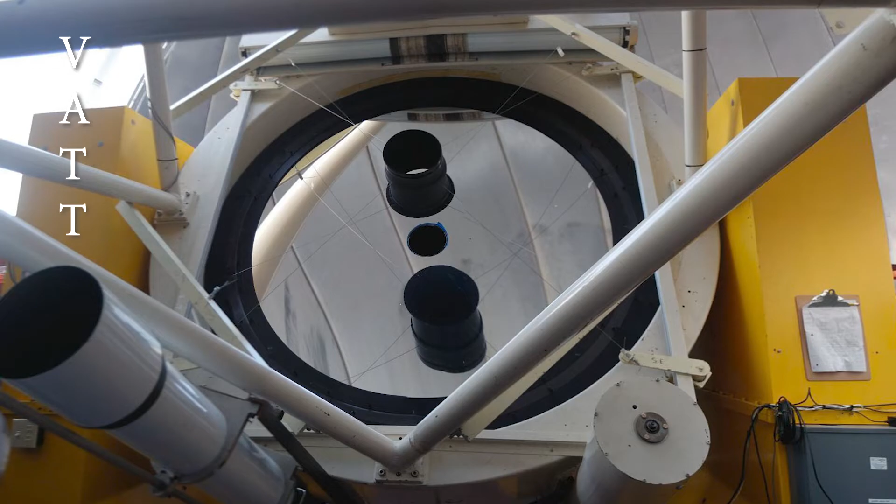But today I'm working on something that was specifically requested to help out the observatory. Our main telescope is the Vatican Advanced Technology Telescope, or VATT, located on Mount Graham in Arizona. Right now, there is an effort underway to robotize the VATT, to make it able to operate on its own or remotely according to a specified observing plan. That's going to be very expensive, and the Vatican Observatory Foundation is trying to raise funds to support this project and other scientific efforts.

So that's where I come in. They asked me to design a mascot for this project, a little robot version of the telescope. I call it Vatty. A model of Vatty, handmade by yours truly, will be given to people who make a significant contribution to help out the robotization effort. So stay tuned to find out how you can get one of your very own.

Now, the one that I'm making today is for Sister Raffaella Petrini, the Vatican Secretary General. She saw the prototype and personally requested one. And who am I to say no to the Secretary General? So let's get to work.

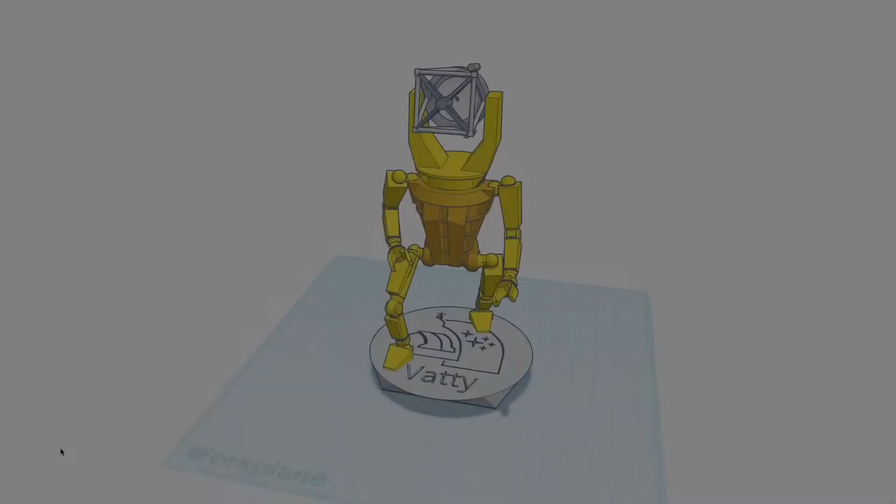Of course, you have to start with a good design. I designed Vatty using Tinkercad, and for the pose, I wanted it to be moving forward, much like the robotization project itself.

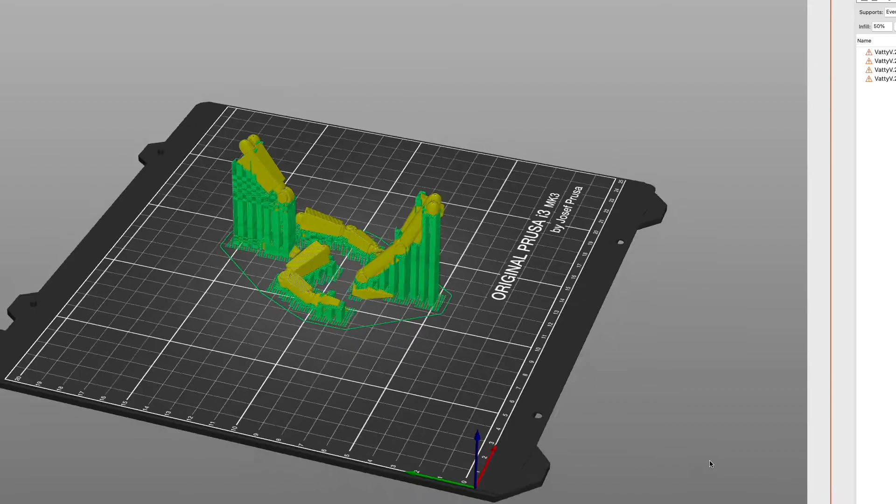Once designed, I sliced it in Prusa Slicer. I set 0.1 millimeter layer height, and I made sure that everything was well supported. And now it's off to the printer.

With the small layer height, it's going to take several hours to print, and even sped up, that'll take a while. So while we're waiting, let's talk a little bit about the VATT and what makes it special.

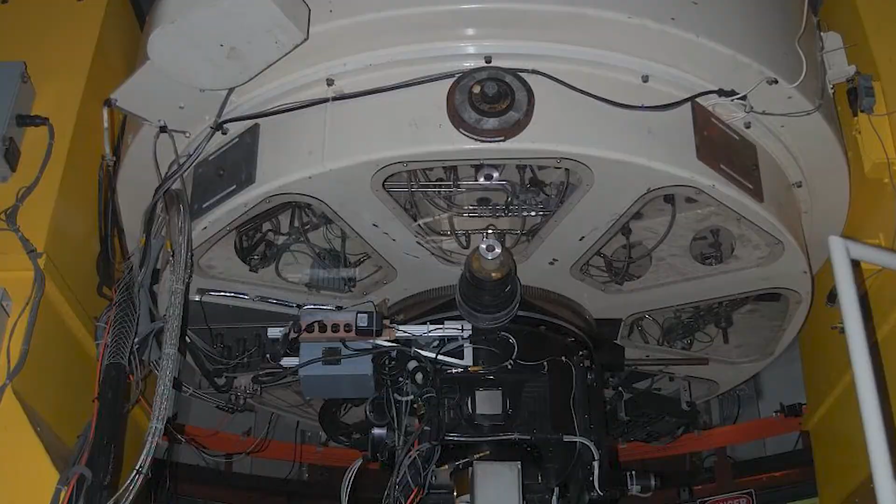The most notable feature of the telescope is its mirror. The VATT utilizes the first ever spin-cast mirror developed by the Steward Observatory at the University of Arizona. So what is spin casting? It's a cool way to make very large mirrors.

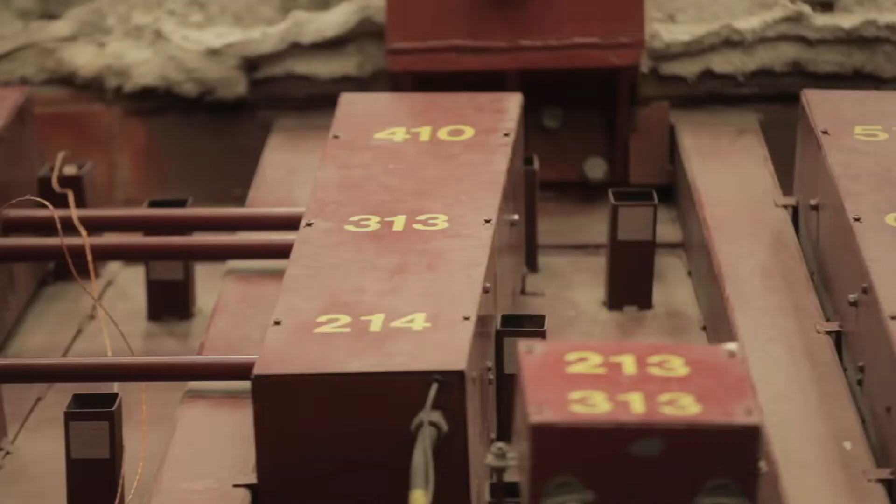Traditionally, to make a mirror, you would start with a huge block of glass, and then you would grind it, and grind it, and grind it some more, until eventually you have a nice bowl shape that, when given a reflective coating, would bring starlight into focus. Now, there are several drawbacks to this technique, and one is that for a multi-meter mirror, it could take years to grind away all that glass.

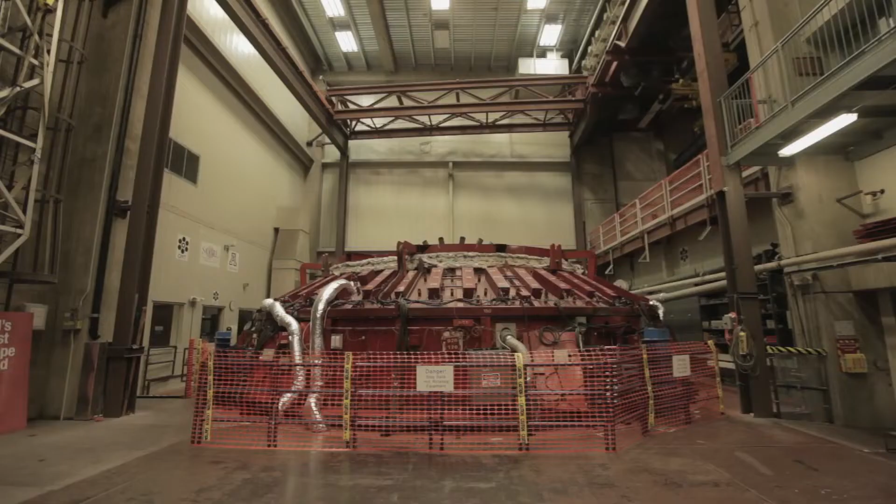So a guy named Roger Angel at Steward Observatory came up with a great idea: lay out a bunch of glass in a big rotating furnace. That's right, the whole furnace rotates. That's the spin in spin casting. The glass melts into a liquid, and because the whole thing is spinning, the centrifugal effect forms it into a nice parabolic shape, which is exactly what you want for a telescope mirror. Then you keep the furnace rotating as it cools and resolidifies, and voila!

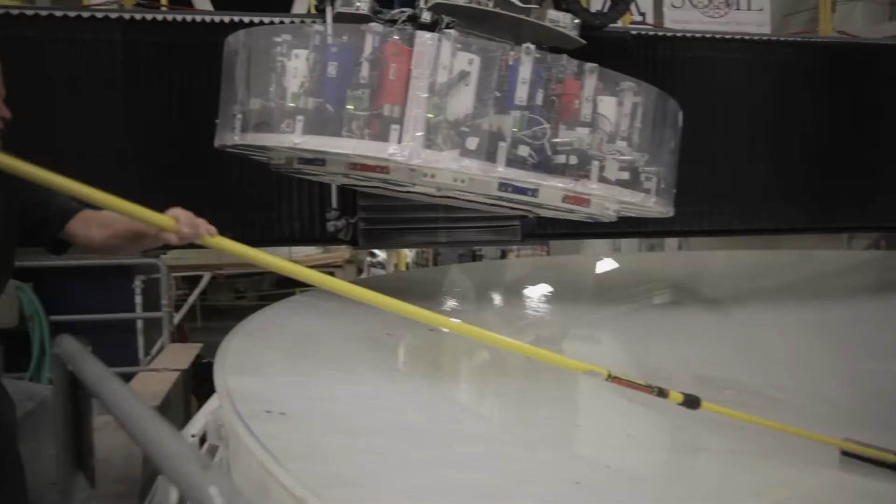All that's left is to polish it to perfection. On top of that, because the mirror is cast in a special mold, you can do more with it. The backing is a hollow honeycomb structure, which removes a lot of the weight. The honeycomb also helps it maintain thermal equilibrium with the surrounding air, preventing thermal warping of the mirror.

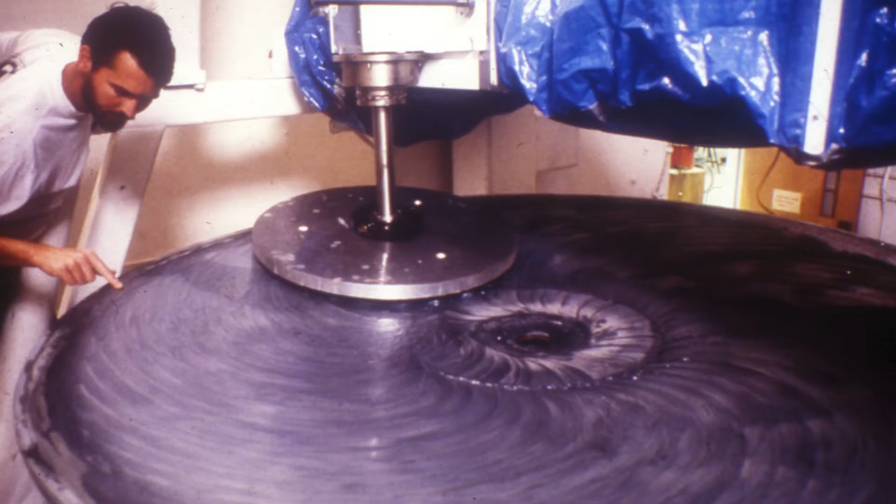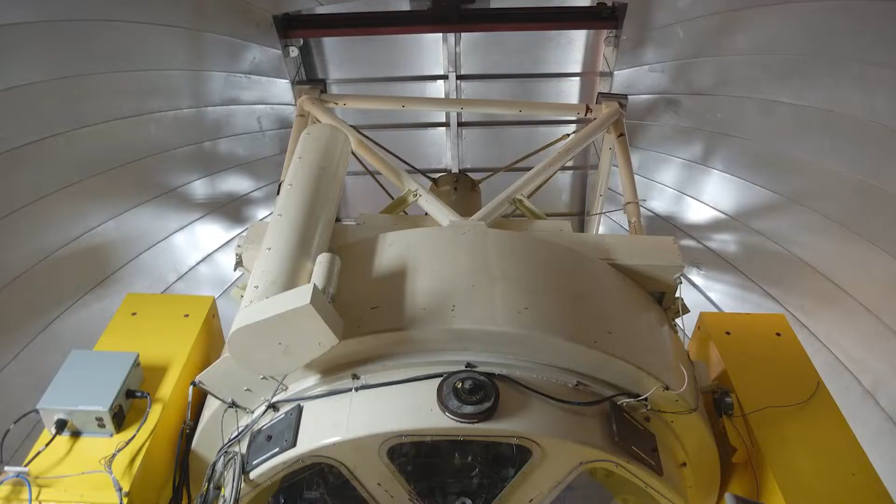In the end, you end up with a very light, large mirror that can be made in a matter of months rather than years. In addition, you can make a very deep parabola that gives it an incredibly short focal length. The VATT mirror is at f1 with a focal length matching its 1.8 meter diameter. That means a much more compact telescope. In fact, the VATT has such a fast focus that the secondary mirror is actually placed after the primary focus.

And that's got its own advantages, but I'm starting to run too long here, so let's get back to the build. So it looks like the printer is coming along nicely.

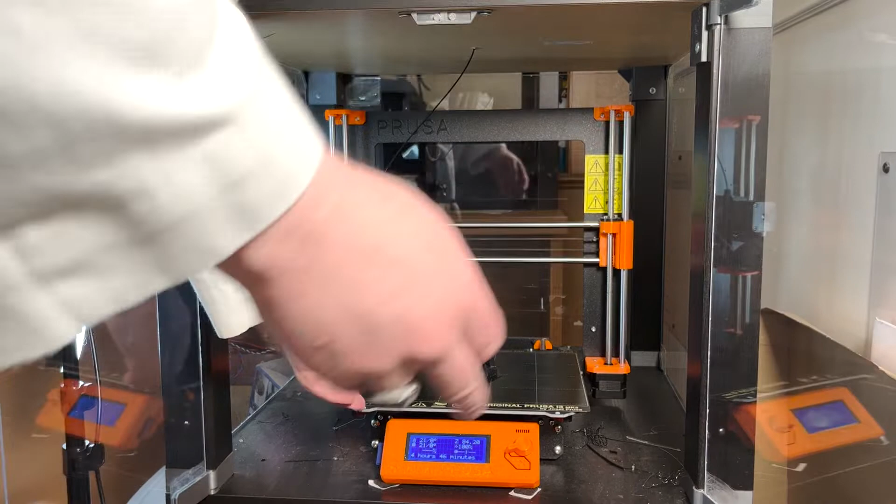After many hours, the printer is finally done with these parts, so it's off to the workbench. And I have to be really careful removing it from the base, because back when I made the prototype, I managed to rip the foot off, and so it's best to shim it out with a knife blade.

But now there's all those supports to remove. I'll use a pair of pliers for that. This will take a while, so let's kick it into high gear.

All that just for the arms and legs. Now to print and clear all the other parts.

Oh, we're far from done. There are print lines and some rough edges where the supports were, and that means sanding. And sanding. And some more sanding. A little more. Am I done yet? Not even close.

The cage for the secondary mirror was tricky to print. A resin printer would have done better, but I don't have one yet.

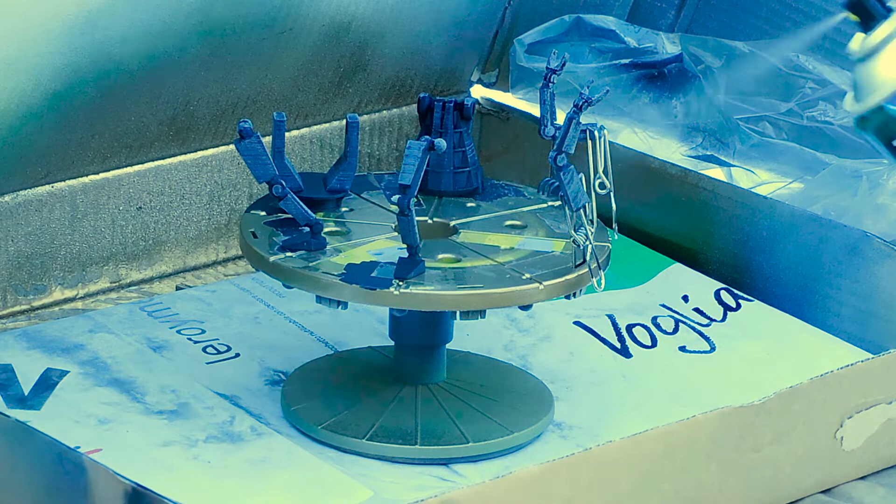And now to my makeshift spray booth outside. These parts will get a solid base coat of traffic yellow, which is the color of the VATT armature.

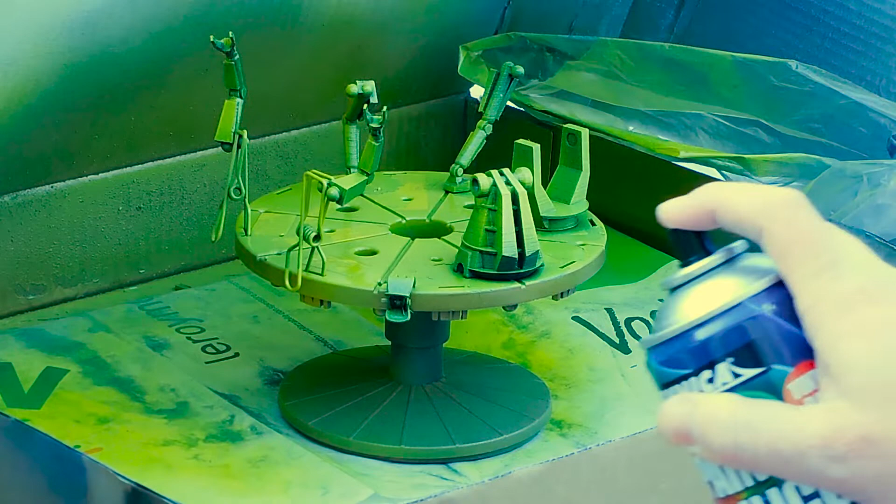And the mirror gets sprayed silver. And the base gets light gray. The deep black crevices of the logo and text contrast nicely with this color.

Once the paint has dried, the mechanical parts of the robot get painted metallic gray.

So does the secondary mirror.

The shoulders and collar will be light gray to match the telescope.

A dark wash will add contrast to the details and also make it look like it's seen some use. It's particularly important at the joints.

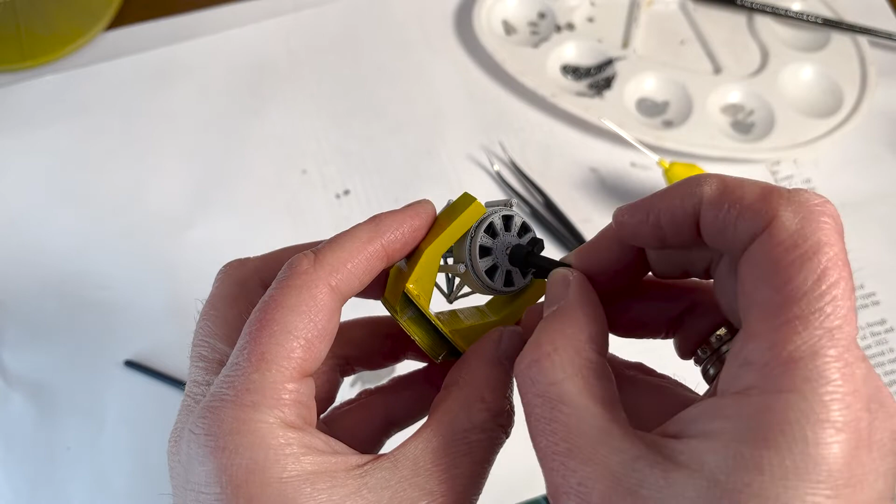A small piece of toothpick will help hold the instrument package in place. And in case you're wondering, this happens to be the spectrograph. And now the telescope, the head of the robot, is done.

To assemble the body, I've created a special jig to hold everything in its proper place. The torso slides right in there.

The leg gets glued into the socket, and then positioned on the jig. The same for the other leg. I'm letting the glue on each limb cure before attaching the next.

For the head, I start with a tiny dowel to align it on the neck. I just eyeball the rotation. I want it to be looking slightly to the left.

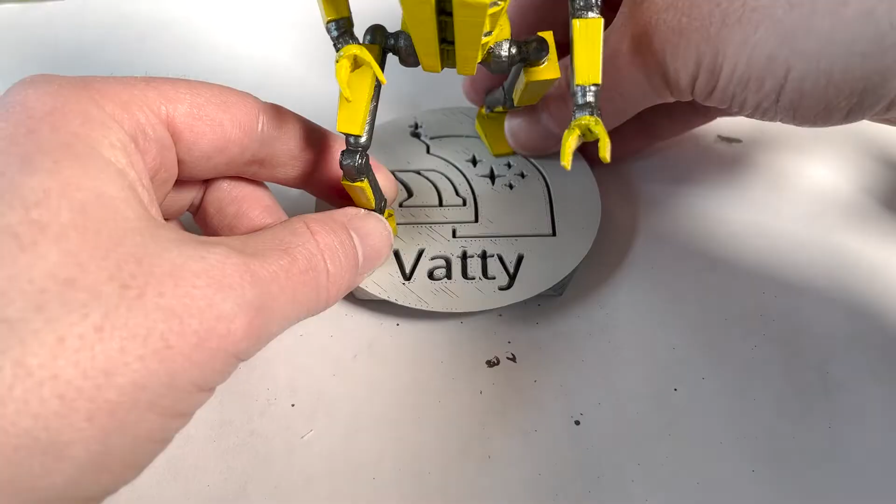Now it glues onto the base. The model can't stand on its own, so it needs some support until the glue dries. And now it is done.

Well, I think this thing came out really well, and I look forward to presenting it to Sister Raffaella Petrini.